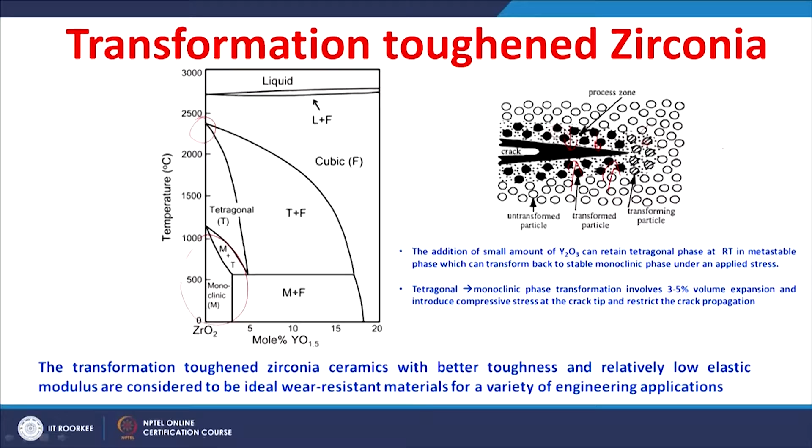These transformation toughened zirconia ceramics with higher fracture toughness and relatively low elastic modulus are considered to be candidate materials for several wear resistant applications. So, today we consider yttria stabilized tetragonal zirconia polycrystalline ceramics for understanding their wear behavior. These ceramics were prepared by spark plasma sintering with 3 mole percent yttria stabilized zirconia.

In these two cases these were co-precipitated, whereas in the other 3 cases this 3YTZP, that is 3 mole percent yttria stabilized zirconia, was mixed with other powder without yttria, to have an overall content of 2.75, 2.5 and 2.0 mole percent of yttria. This investigation was done to understand the effect of yttria on the wear behavior.

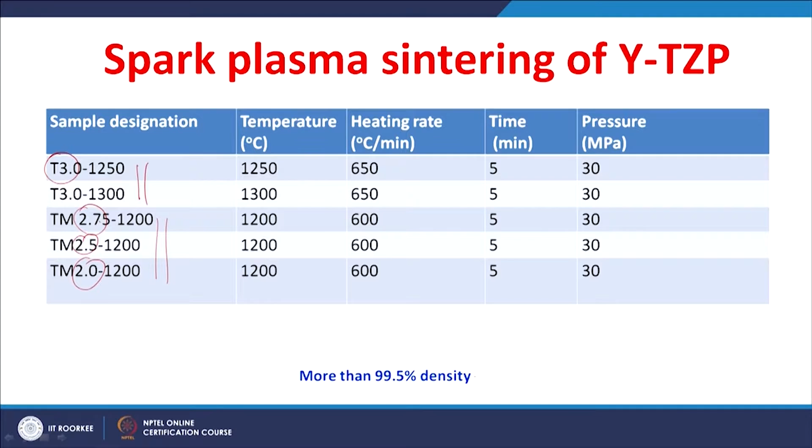The first 2 samples were done at different temperatures of 1250 and 1300, and the other samples were done at 1200 Celsius, keeping all the other SPS parameters constant. All these spark plasma sintered yttria stabilized zirconia polycrystalline ceramics were of more than 99.5% density.

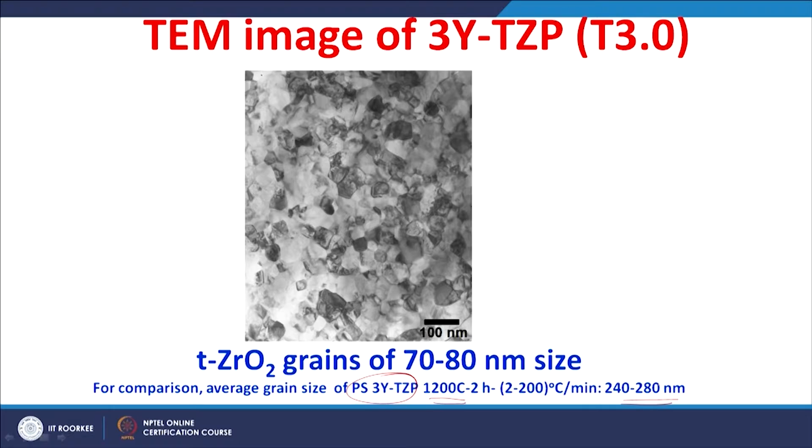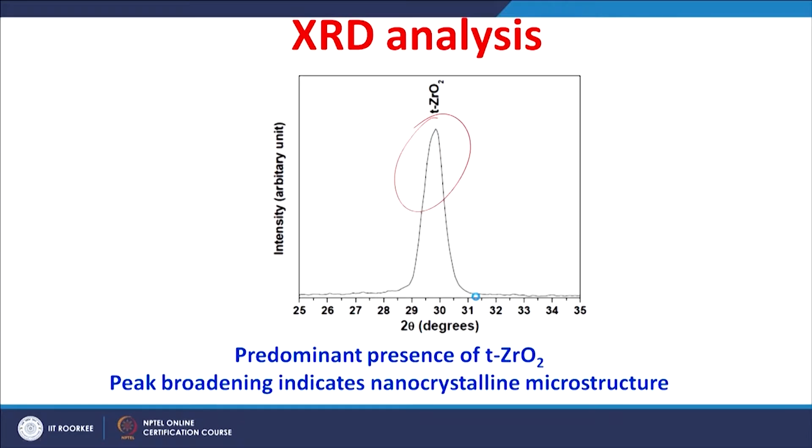In spark plasma sintering, the heating rates were also high, at around 600 Kelvin per minute, whereas pressureless sintering was done at lower rates of heating. So, you get tetragonal zirconia grains of around 70 to 80 nanometers, and all our XRD analysis also indicates the predominant presence of tetragonal zirconia. We started with the tetragonal zirconia powder, and the same tetragonal zirconia was retained even after sintering. But we can also see peak broadening, which indicates a nanocrystalline microstructure. The microstructure also shows grains of around 70 to 80 nanometers.

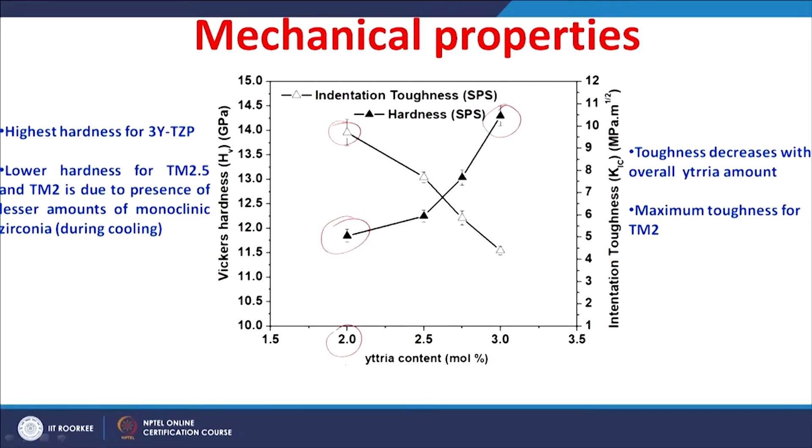So, a combination of higher hardness of around 14 to 14.5 gigapascal and a fracture toughness of around 9.5 MPa root meter can be obtained by changing the yttria content. With this information on the material, the fretting wear test was conducted for these zirconia ceramics against a steel ball. Fretting was done in mode 1 fretting conditions, which gave gross slip conditions at the contact.

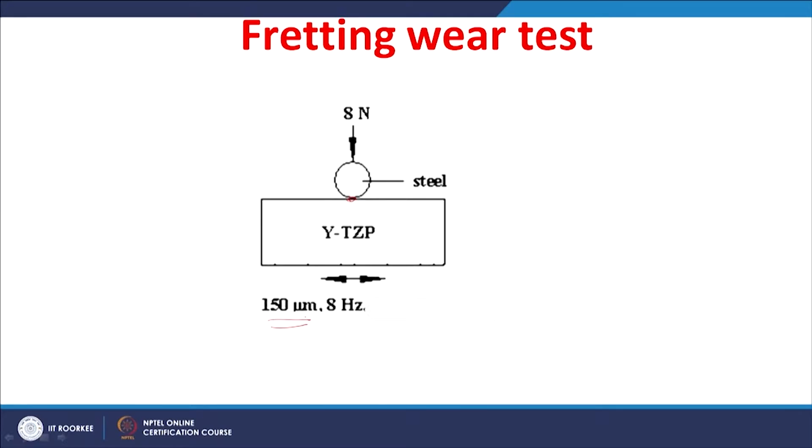So, keeping all the parameters constant, this fretting is a small amplitude oscillatory sliding movement. The oscillation is around 150 micrometer and the frequency of the oscillation was 8 hertz, and this was conducted for a number of cycles up to 100,000 cycles.

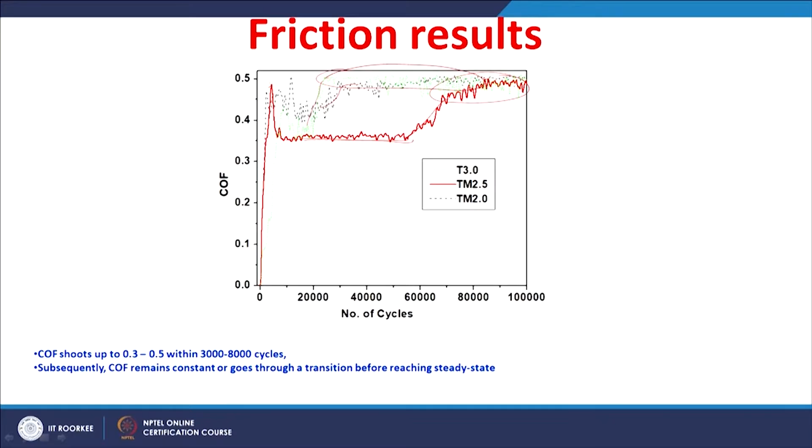So, it actually indicates that the friction is dependent on the yttria content in this zirconia nanoceramic material. So, overall the higher coefficients of friction were obtained for all 3 samples after around 100,000 cycles of this fretting against steel. So, the wear rate was determined.

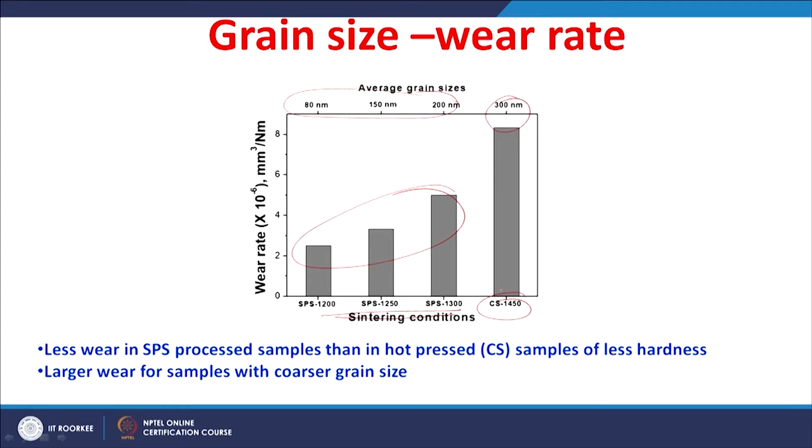So, in addition to that, if you see this with respect to the grain size, the conventionally sintered material has an average grain size of around 300 nanometers, whereas spark plasma sintered have a very less grain size of around 80 nanometers minimum. So, it has around 80 to 200 nanometers average grain size with changing sintering temperature from 1200 Celsius to 1300 Celsius. The wear rate was less for the spark plasma sintered ceramics having finer grains, whereas the coarser grain material showed a larger wear.

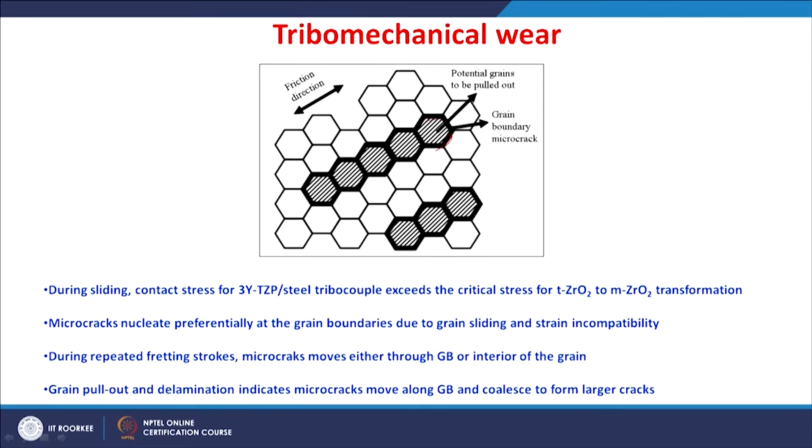So, the grain pullout and delamination both indicate the microcracks move along the grain boundary, they coalesce with each other and then form longer cracks. So, you can see the cracks also where there is a surface layer, there is a delamination of this layer.

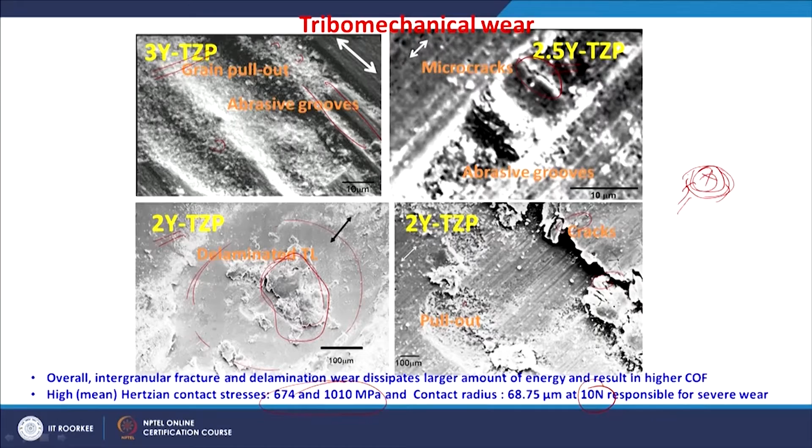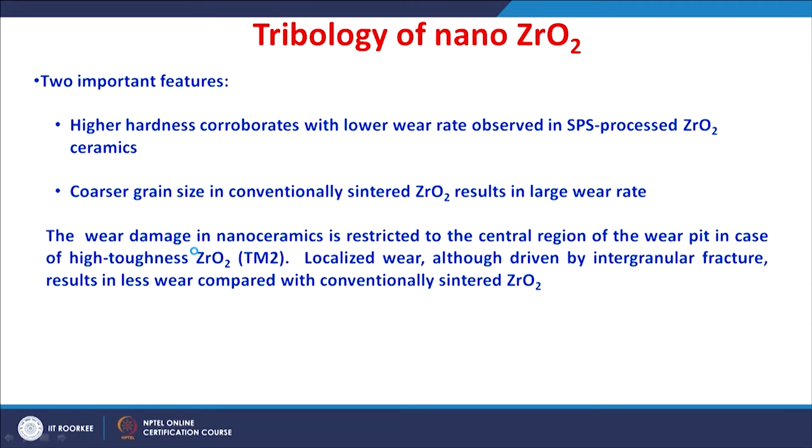So, among the investigated ceramics, the 2% yttria stabilized zirconia showed a maximum toughness. Because of the higher toughness, the wear damage is restricted only to the contact stress region, where it is maximum. The contact stress is maximum at the central region of the wear pit. So, it is localized wear. Such a localized wear, although driven by intergranular fracture, results in lesser wear compared with that of the conventionally sintered zirconia.

So, these results can be concluded: better wear resistance is exhibited by the spark plasma sintered zirconia polycrystalline nanoceramics in comparison with the conventionally sintered nanoceramics. Also, the nanoceramics of varying yttria stabilization from 3 to 2 mole% show almost similar frictional behavior, with steady state reaching a maximum of around 0.5, whereas the wear rate lies around 10^-6 mm³ per Newton meter for these ceramics.

With respect to the mechanisms of material removal, basically tribomechanical wear in terms of intergranular fracture and grain pullout occurs for these nanoceramics, whereas microcracking around the transforming tetragonal grain boundary leads to wear loss of the nanoceramics. The deeper and wider abrasive grooves are observed on the 3 mole% yttria added zirconia nanoceramics. On the other hand, the wear damage is highly localized to the central region of the worn surface for the ceramics having a higher toughness, which in this case is 2 mole% yttria stabilized zirconia polycrystalline ceramics.

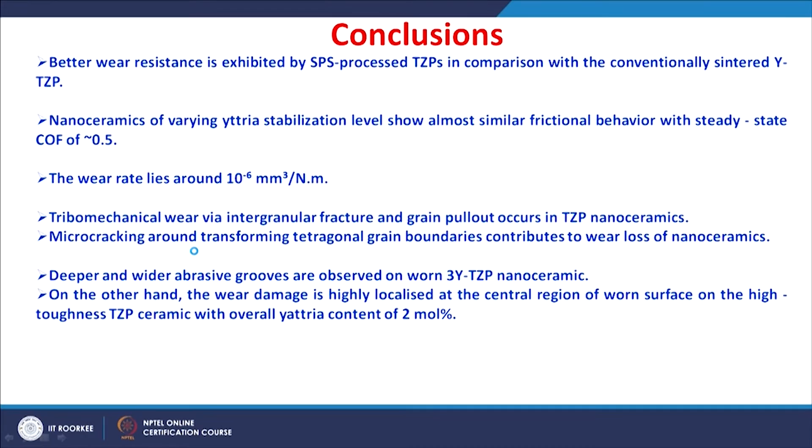So, this particular investigation is very important to understand the effect of the overall yttria content on the wear behavior of these nanoceramics. In addition to that, it also gives information about the beneficial effect of the nano sized zirconia processed by spark plasma sintering over that processed by conventional sintering.

So, the friction in the steady state does not change much, but is always higher because of the rough surface, which is characterized by the intergranular fracture where you have a lot of grain pullout. As the yttria content decreases to 2 mole%, it results in a higher toughness. So, you have localized wear, so you get lesser wear compared with that observed for the 3 mole% yttria stabilized zirconia.